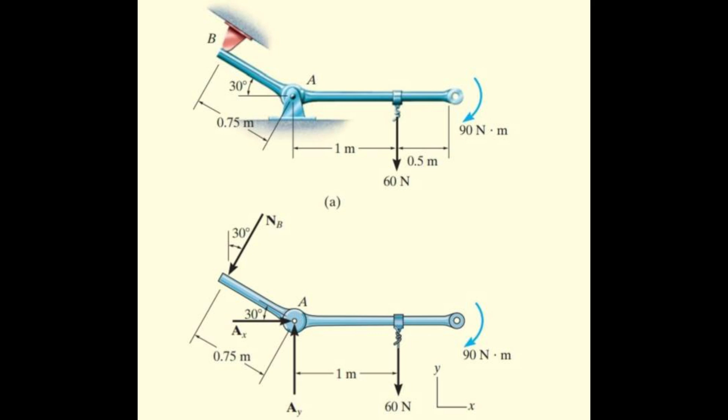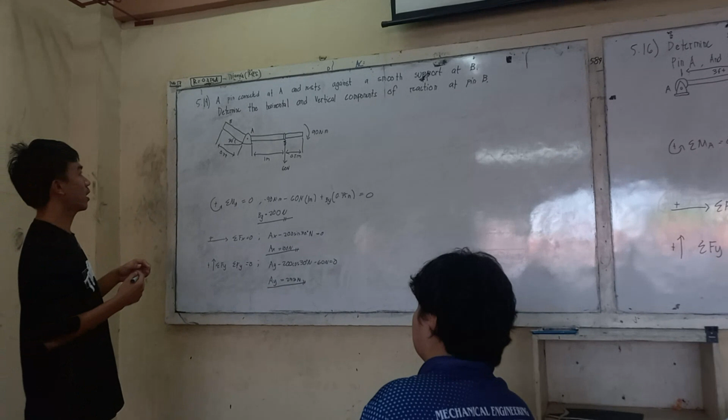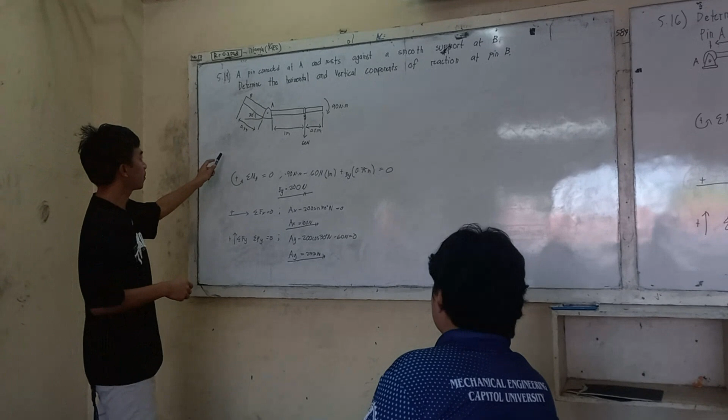So we have the problem figure of 5.14. A pin connected at point A and rests against a smooth support at point B. Determine the horizontal and vertical components of reaction at A and B. So we have this diagram. We have a 30 degrees angle that acts along the x-axis and 0.75 meters of distance at point B.

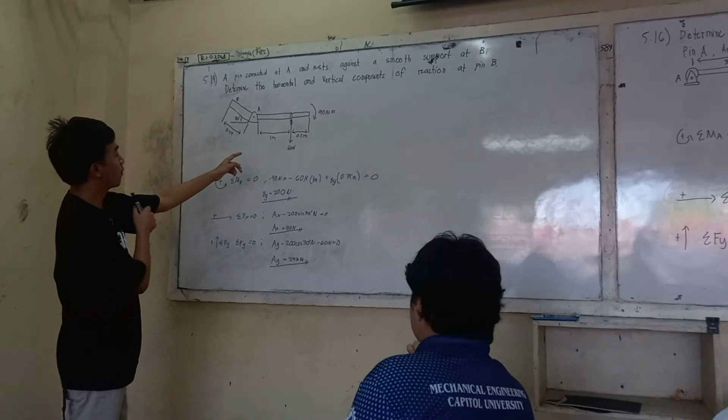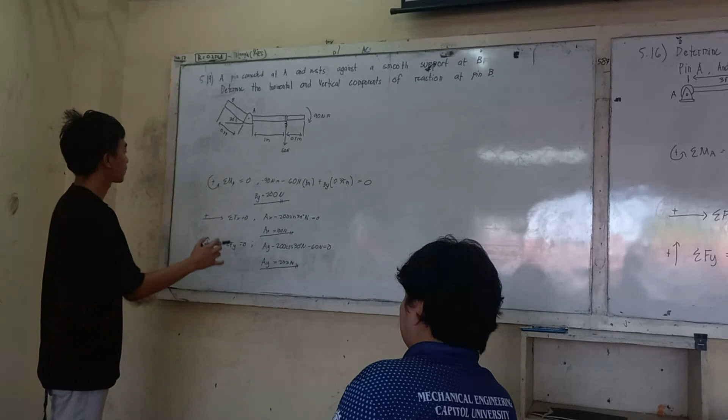Then we have a 1 meter distance from point A to the 60 Newton force of the spring, and from the spring to the 90 Newton meter force, we have a 0.5 meter distance. So first we will take the moment at point A, because at point A we have a lot of forces that act.

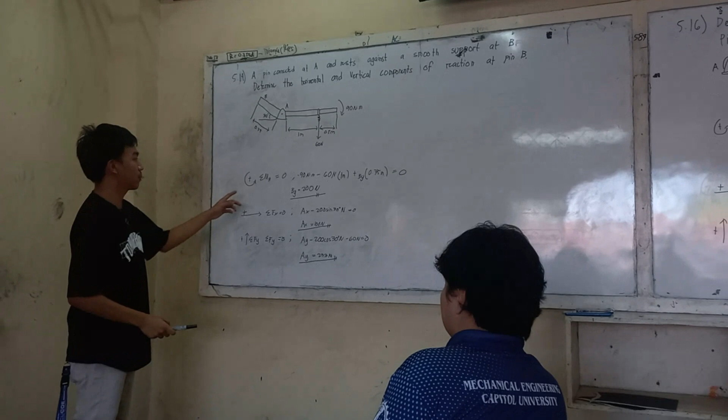So let's assume that counterclockwise is positive, and summation of moment A is equal to 0. So from positive 90 Newton meter, we will have the negative 90 Newton meter minus 60 Newton multiplied by its distance 1 meter plus By multiplied by 0.75 meter. So we have a By of 200 Newton.

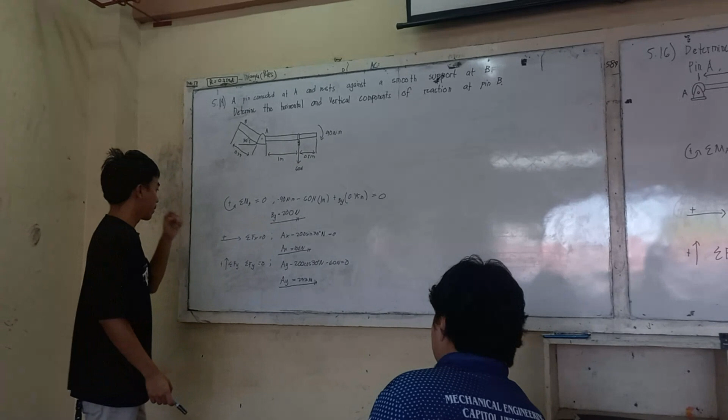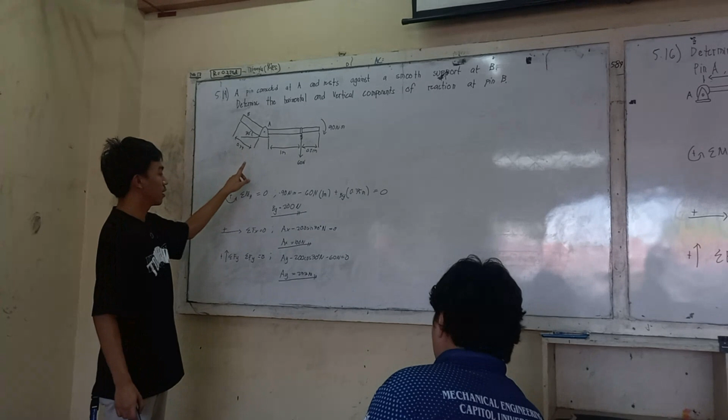So for our summation of Fx, Ax negative 200 sine 30 degrees along the x is equal to 0, and we have an Ax of 100 Newton. And for our summation of Fy, Ay minus 200 cos 30 degrees minus

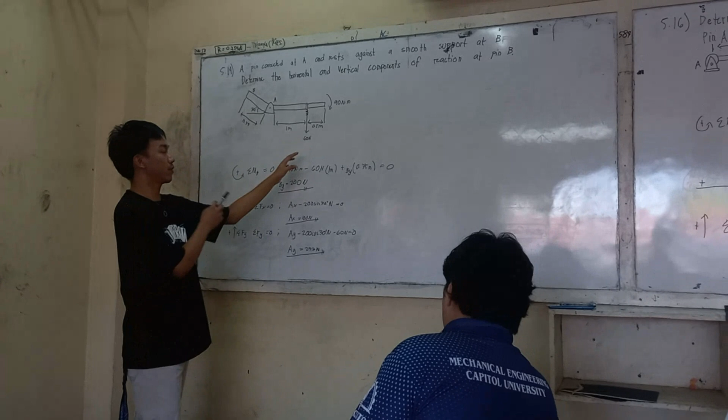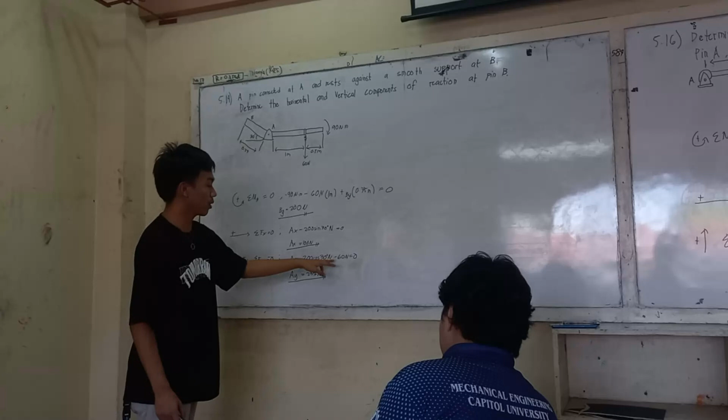our 60 Newton force of the spring, because it's going downward and our forces will be perpendicular to each other, so it will be negative, so negative 60 Newton, and we have an Ay of 233 Newton. So any question?

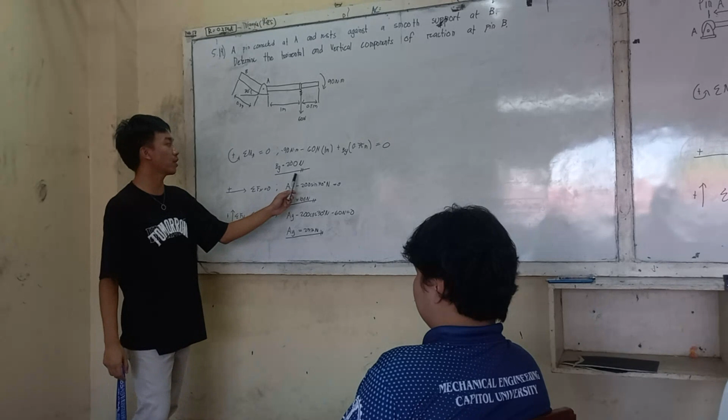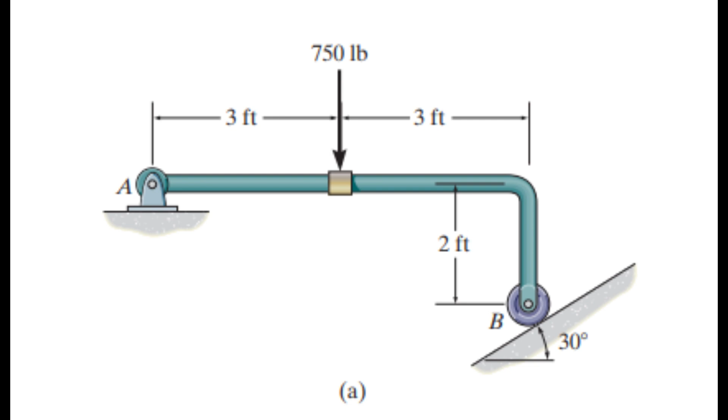This problem 5.16, we have to determine the horizontal and vertical components of reaction at the pin A and the normal reaction at the roller B.